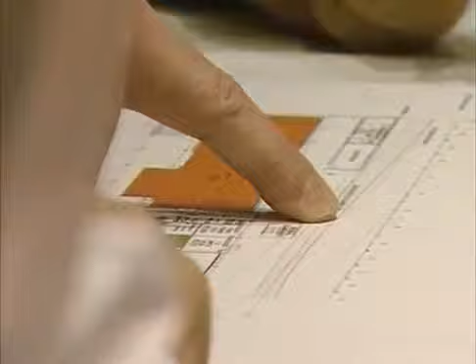Well, we had a very open brief. The club hadn't really attempted anything like this before, so they weren't dictating any particular method of working or role or brief for us. And we formed a steering group with about 7 or 8 of the key people, consultants and clients involved with the job from pretty much the outset in March, April of 2000. And we managed that group, and that really was the springboard for how the project started.

A major issue for the board of directors was to gain acceptance from the fans for a move from a much-loved home. This would be greatly helped by keeping Arsenal in North London. Not an easy task, finding enough land to host the footprint of a massive new stadium and the associated increase in traffic to and fro.

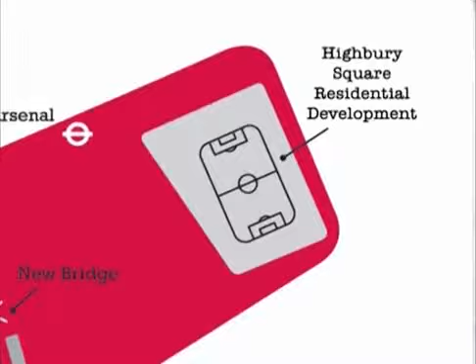Amazingly, the Arsenal directors managed to find a site only a few hundred yards from Highbury, but it was far from deserted. We very quickly realised that the project was broken into 3 fundamental parts: a new stadium, a relocation site at Lough Road where we would have to provide a lot of the facilities that were on the Ashburton Grove site, and then the final phase was Highbury Square.

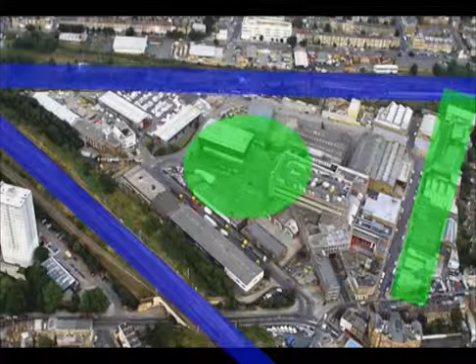Ashburton Grove is roughly a triangle. To the west and the east are mainline railway lines, and to the south a small industrial estate. In the centre lay a council-owned recycling unit, and this would need to be resited at cost to the club, as would the acquiring of the industrial units.

And the rest of the project included the very substantial relocations of the North London Waste Authority's waste transfer station, council's depot, their building maintenance department, and then there were a myriad of other occupiers on the site who all had to be relocated and their site purchased, or just a straight site purchase. And that actually became the major focus of the first 3 years of the project.

The entirety of the site included land beyond the boundaries of the railway lines and beyond the Southern Road. And whilst this extra land could all be used, the stadium footprint would have to be within those boundaries.

A key decision was taken to appoint a builder during the design process, not always the case in such projects, and a decision which in retrospect was fundamental to the outstanding success of the project.

Well, we had a very interesting shortlisting. We started with about 6 companies who we thought might be capable of building the new stadium. Really at interview, 2 or 3 of those companies didn't really fit the bill. And then McAlpine were the most memorable, really.

At interview, Rolf Christensen very much came across as somebody who wasn't in any way or shape concerned about the magnitude of the project, wasn't overwhelmed by the project, and was very confident, and even relished the deadline nature of building stadiums and having them open for the beginning of football seasons.

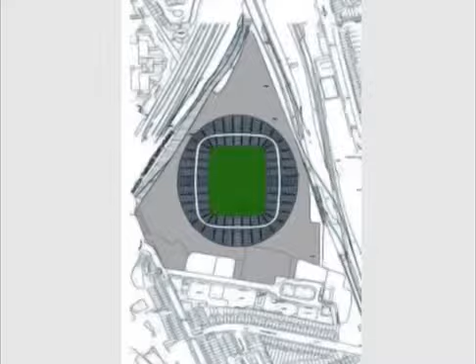An obvious but crucial design decision was choosing the distinctive shape of the stadium. A more conventional rectangular design was discounted, as it was too wasteful of much needed land, and in the end it came down to simple geometry, in that the elliptical shape fitted snugly into the triangular nature of the site, squeezing every inch from the available space.

And we were all new to it, so we all sat down and discussed every part of it, what was required, and they had traveled around at stadiums all over Europe, perhaps the world, and they had an idea what they wanted.

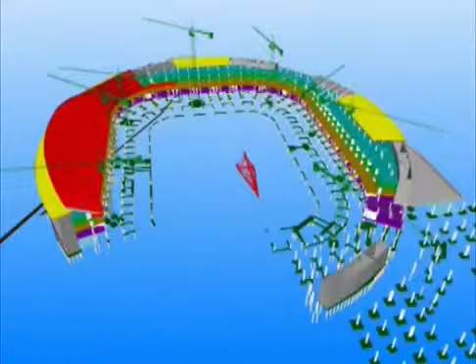We all worked very hard to get what they wanted onto paper and get the engineering right, and that was a real challenge. The 6 months we spent in pre-construction, without it I think we would have had a few problems. We avoided problems, and basically the construction went like clockwork - we completed it within time, and even handed it over earlier.

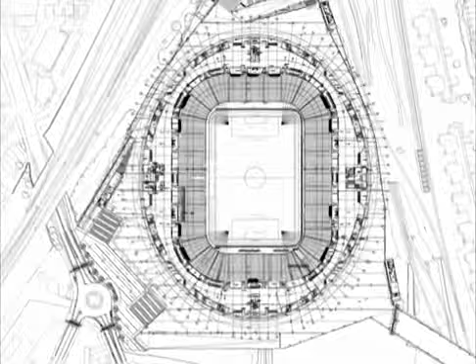To gain planning consent, the club would need to demonstrate that 60,000 fans could come and go to the ground with as little negative impact to the local community as possible, preferably using public transport.

Two massive bridges were designed on the east of the site, spanning the railway line and taking fans to both underground and above ground stations. Another obstacle was the recycling unit at the site's very centre, which would have to remain in operation through the early part of the build, whilst a new unit in Lough Road was constructed.

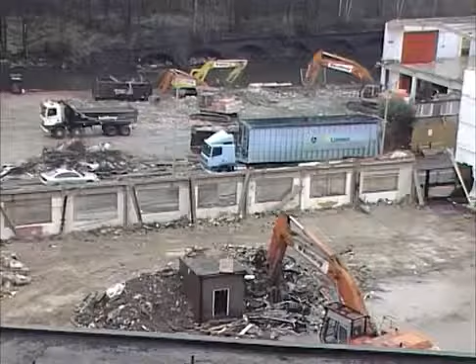Positives to the community were needed in addition to a new recycling unit, and it was determined that the stadium would generate much more than simply a new football ground. Areas within the site would contain affordable housing and give the companies on the industrial estate a chance of resettling into new premises. What was known at this stage as simply Ashburton Grove would be a much needed and major regeneration of the area.

With designs finalised and consents gained, some 2,500 signed documents later saw demolition teams move into Ashburton Grove in February 2003, and McAlpine's site teams settling into their new offices. Again, having designers, engineers and management on site was an important ingredient in the project's success.

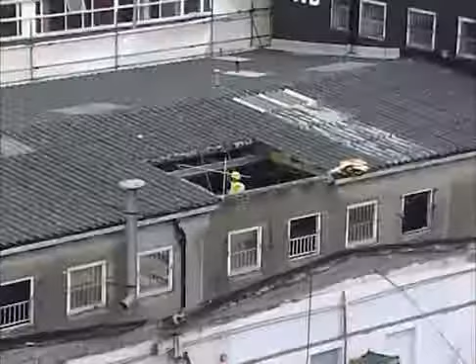Just as things were starting to happen, it all ground to a halt. It was about the end of March 2003. We'd been through, without doubt, the toughest year on the project, going through all of the contract negotiations with McAlpine and the funding with the banks. We finally had virtually every one of our ducks in a row.

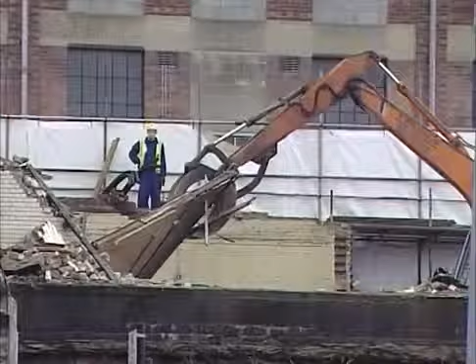Both myself and the client separately went off on holiday at the end of March. When I got back a week or so later, I went in to see him, and he gently dropped the bombshell that one of the banks had pulled out and that the funding wasn't now possible for the stadium.

Work stopped and the site was mothballed, though Sir Robert McAlpine used this pause in construction to continue design development and progress the Lough Road Waste and Recycling Centre.

Today is an historic day in the life of Arsenal Football Club. I'm delighted to be able to announce that the funding has been secured for our new stadium project.

By the time the funding came in, that was 4 years on the project, and I think everyone had put so much into it that the thought of it not proceeding was awful. So there were some pretty major celebrations at the end of February when the banks finally signed up.

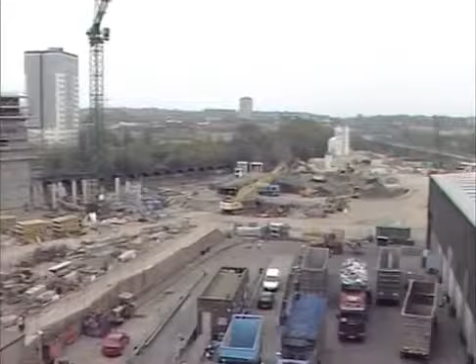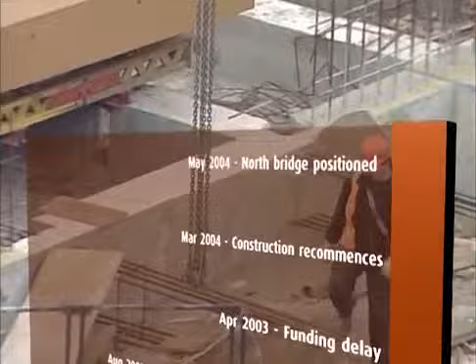With the funding now in place, McAlpines resumed work immediately and with some haste. If milestones along the critical path were not met at this early stage, it might have significant impact later in the project. Railway possessions and such like had been booked well before the hiccup in the funding. If the Arsenal board hadn't funded the continued fabrication of the bridge components, and if it wasn't for the speed in which McAlpines resumed construction, there could well have been delays.

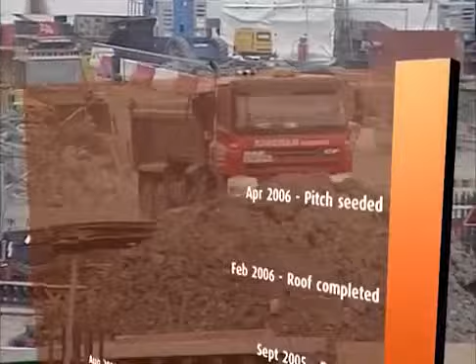Within a matter of weeks, the stadium started to take shape, and the practicalities of the construction programming became evident, with one end of the stadium apparently racing ahead. Of course, this was far from the case.

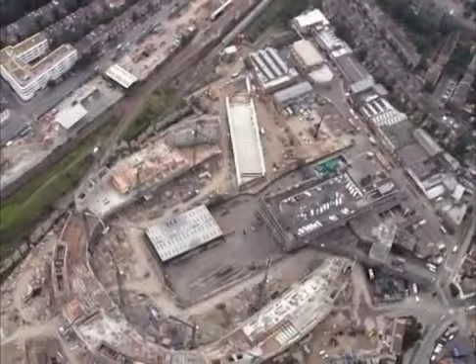Crucially, the bridges' construction had to be on time. Their assembly site actually fell into the path of the stadium, so they needed to be built and moved into place so as not to delay construction to the south end of the stadium.

Because of the constrained nature of the site, the construction programme was to commence the northern parts of the stadium first, leaving space for the bridge construction and the continued use of the recycling unit, and afterwards programming the construction of the lower terracing in the south stand to create enough space for the roof truss assembly. Any delay to either the bridges or the roof would delay the fundamental stadium structure.

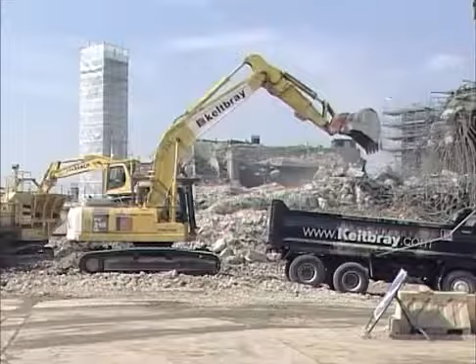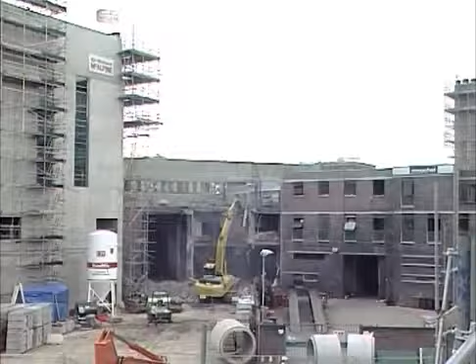We were knocking the buildings down as they were being vacated, or in the first instance having the services isolated - building vacated, demolish, remediation, and then piling, subsequently following on as closely as we could behind the piling with the substructure. So you have a fine balance all the time in terms of trying to do one operation as close as you can to the next without losing efficiency in one or other of the operations.

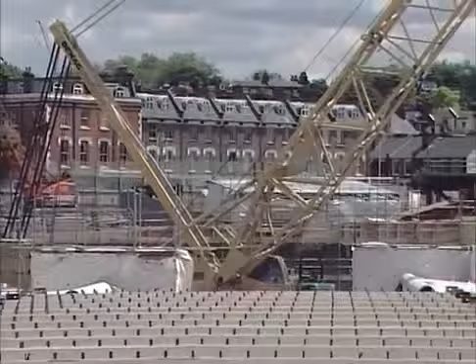Because of the unusual nature of the site, roughly a triangle surrounded by railway lines on two sides, one of the key aspects of the design were for two bridges to be constructed on the northeast and southeast of the site. To get the crowd away, we built two bridges across the railway line, and they are massive bridges. One is 26 metres wide and the other is 18 metres wide - two massive bridges just to take and spread the crowd.

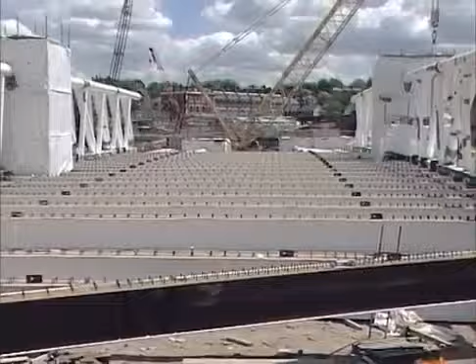There had been a few disasters with football stadiums and crowd issues, and all this was taken into consideration in the design, so people can escape all over the place.

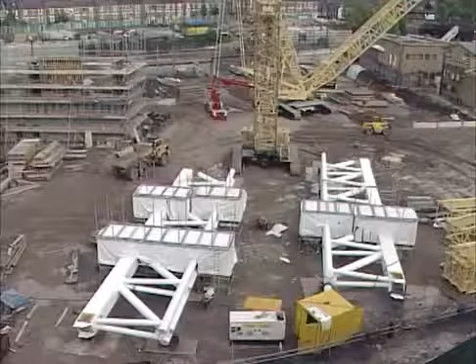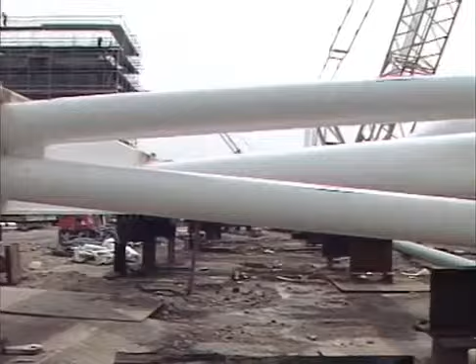Because the stadium structure would fill a huge percentage of the total site available, elements of these bridges needed to be built and completed before the stadium structure was in place. The other intricacy with the site was the extent of works we had to build that weren't necessarily related to the arena. The two bridges are good examples - they were assembled in the plan of the stadium and occupied space we needed to free up to build the stands.

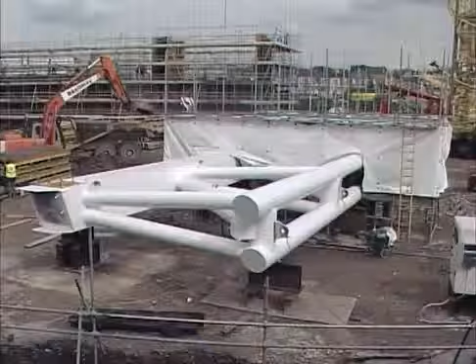The South Bridge in particular sat in the middle of the southwest of the stadium and was built as a whole 100-metre section, then slid across. Until that bridge was located over the railway line and slid into place, that section of the stadium couldn't be built. The same went for the North Bridge in the northeast corner, where elements were built on the stadium site and needed to be positioned, with dependency on getting rail track possessions to install the bridge.

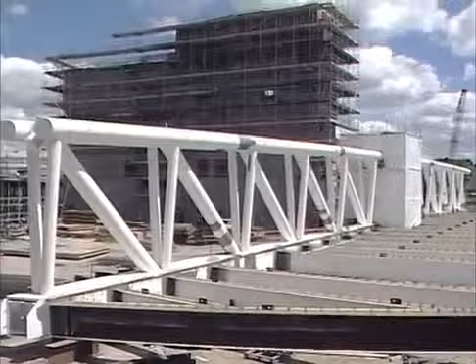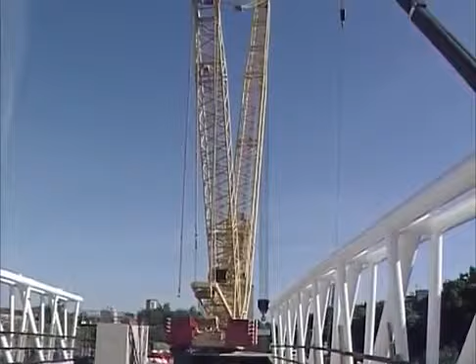There were quite high levels of risk in terms of third-party approvals, and the consequence of not getting the bridge in place was a critical path delay in the stadium. The North Bridge was the first to be completed and was built on site from pre-produced sections. The construction team always knew positioning it on time would be critical to the completion date, and when the funding hiccup in 2003 took place, the good relationship between constructor and client proved crucial.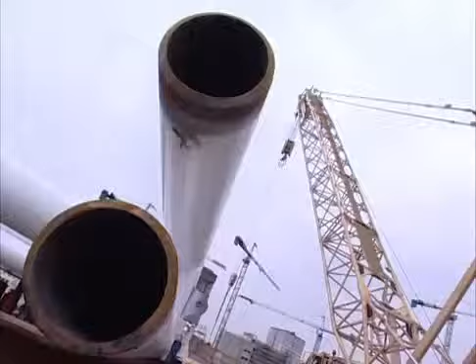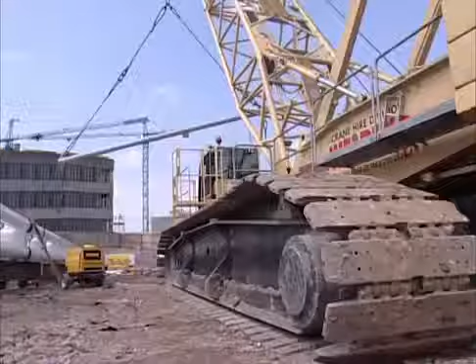We booked that possession 38 weeks prior with Railtrack, so that weekend it had to be ready. To give an example of how committed Arsenal were - that was on the critical path, and then construction was stopped in April 2003 because they didn't get the funding, and it was a long lead-in for material. Arsenal, with their own money, funded the procurement, all the material, the steel, and also the fabrication.

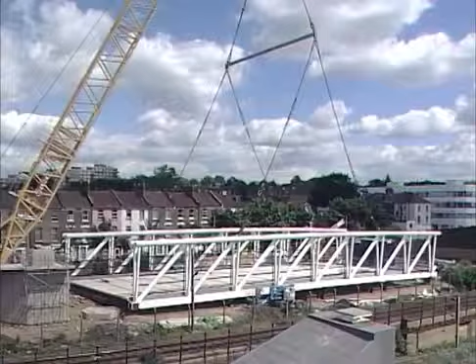So when they got the funding on the 1st of April, we were ready to go, and we managed to get it across in about 15 or 16 hours in the middle of August. That was critical because we couldn't construct the east stand otherwise. It was a real achievement - everybody pulled together and it worked out great.

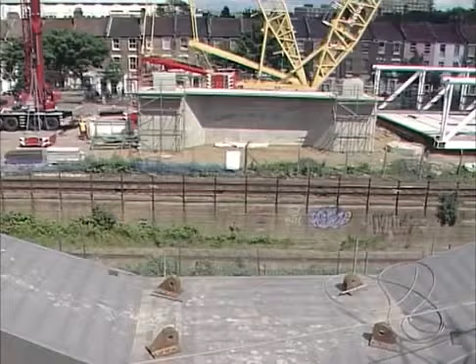With roads and railway lines closed, the North Bridge was ready to be lifted. Built in two halves of 180 tonnes each, the sections were eased into place by massive 750-tonne cranes over two weekend possessions. The second, the South Bridge, was a different animal.

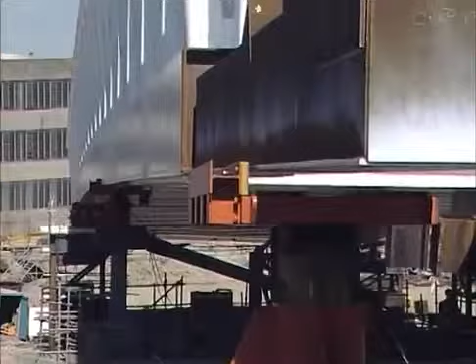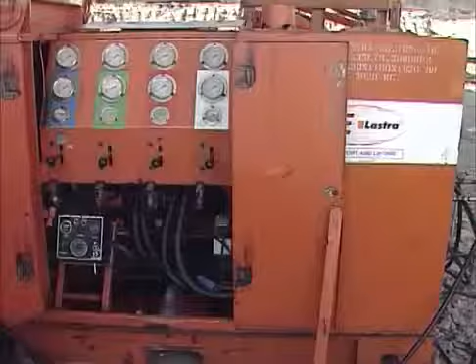It was 100 metres long and weighed 1,000 tonnes, and we basically couldn't get a big enough crane to lift it across. So we had to build it inside the stadium, inside the east stand, and then slide it across.

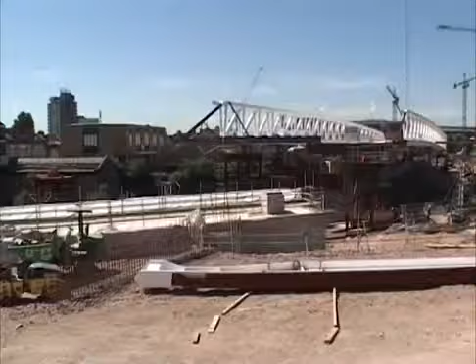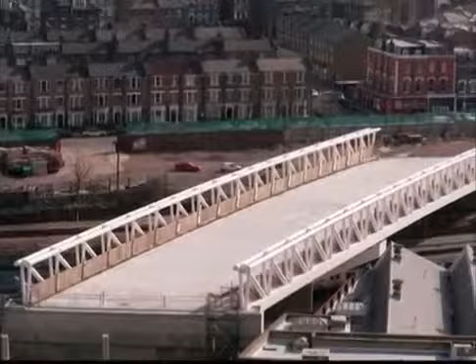A Dutch specialist contractor oversaw this amazing technical operation. A heavily greased 1,000-tonne bridge was gently but steadily dragged across Drayton Park Station with amazing precision. The bridge's completion and its moving away from the stadium structure allowed the southeastern section of the stadium to be commenced, and a major milestone on the critical path was completed on time.

With the bridges in place and away from the stadium area, attention turned to the closing of the recycling unit. Away from the glare of publicity that Ashburton Grove was creating, across town in Lough Road, the landscape had changed, and the new recycling unit was completed and opened. Built in isolation, this would have been considered a major project in any local community, and was a tangible sign to the local population of the benefits the new stadium would bring.

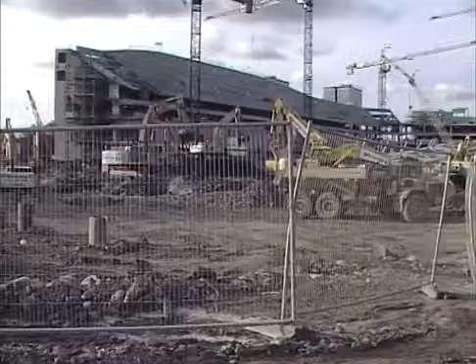Now that demolition of the waste unit could commence, work could begin on the two southernmost cores, and the area that would become a world-class football pitch could be cleared and levelled.

On the 5th of October 2004, the Arsenal directors made another important announcement. Construction of our new stadium has progressed at a fantastic rate, thanks to the great work by our stadium constructors, Sir Robert McAlpine. With the opening of our stadium in the summer of 2006 quickly approaching, we're delighted today to be announcing a significant partnership which will lead us into this new chapter in the history of Arsenal.

This relationship is for both a naming rights partner for the new stadium and also a club sponsorship agreement, representing the biggest ever financial sponsorship deal in English football. So it is my honour to announce the beginning of the partnership between Arsenal Football Club and Emirates. Ashburton Grove was now to be known as the Emirates Stadium. A major sponsorship deal had been signed, and any financial worries for the board started to seem a lifetime away.

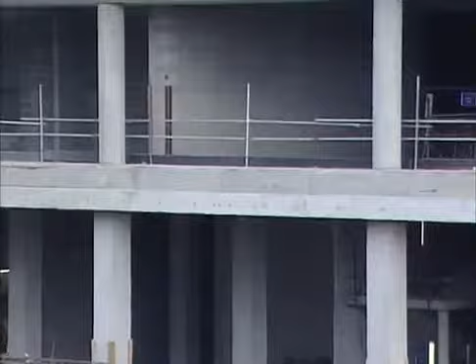The other aspect of the stadium is that on the 7 hectares footprint, the stadium covered the whole area. There was no spare land left at all. And also then you consider that we have 600 or 700 or 800 car parking spaces below. And that is helping everybody. And that is quite unusual, that within a stadium you have the parking facilities.

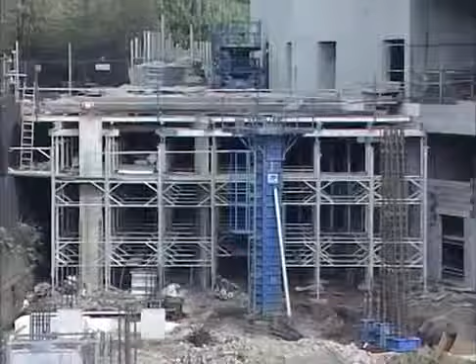The stadium has a raised podium, so everything at ground level is either car parking, changing room, kitchen, storeroom and maintenance room. But all that had to be squeezed into the footprint on this triangle we had at the stadium.

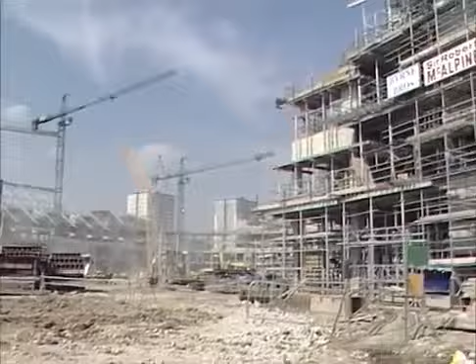The northern end of the stadium raced on ahead of the southern end, until both bridges and recycling units had moved. Then the southern cores could be built, but leaving out the southern prefabricated terracing units to allow space for the roof trusses to be swung into position. Only once the roof trusses were in position could the full stadium continue on to completion.

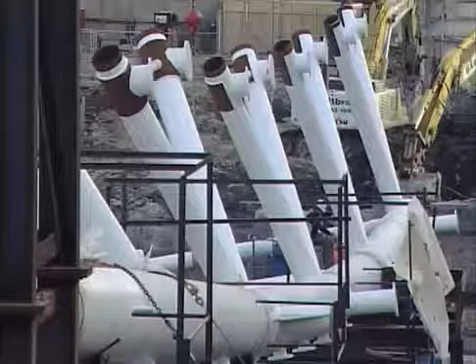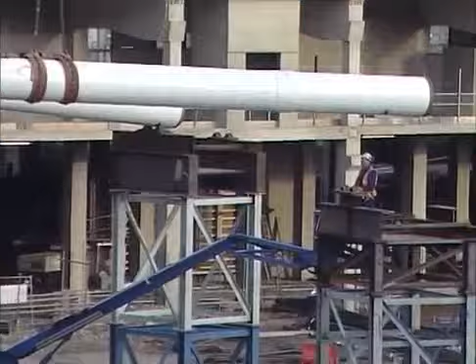The roof trusses had to be built in the same way as the bridges. Prefabricated components were shipped onto site, joined together in the future pitch area, and then hoisted into position and bolted together. The roof was a real challenge. In history, stadiums have had problems with the roof.

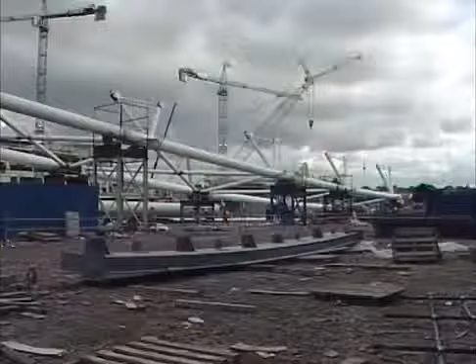And we obviously spent a lot of time together with Watson. Watson's engineering is very, very good, they are tubular specialists, and we have used them previously. We spent a lot of time with them and the structural engineer, Buro Happold. We went through how we are going to fabricate it, how we are going to erect it, and we simplified it. Originally we were going to lift this 220 meter long, 800 ton steel truss in one, but then we decided to lift it in two halves and prop it.

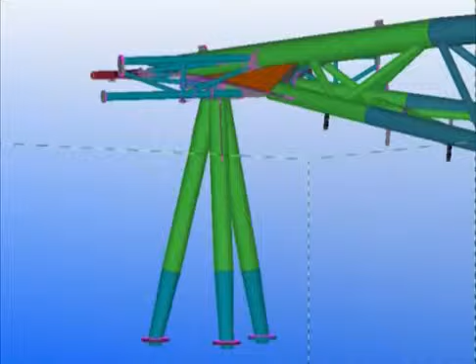And with this 3D model design they used, every steel went up fitted. It did not have to be taken down or remade. This 3D model in the design was definitely a hell of a help for us, and it worked out well. We were able to erect the roof steelwork in 6 months, and that included all secondary steel.

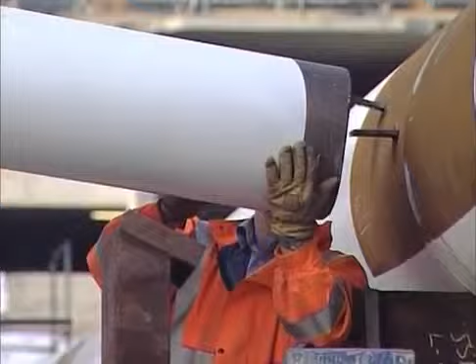We fitted the secondary steelwork at site level, so when they went up it was all fitted, and that reduced the program and also reduced the health and safety risk for people working up in the air. And it was all bolted together. There was no welding up at the top, and it went well.

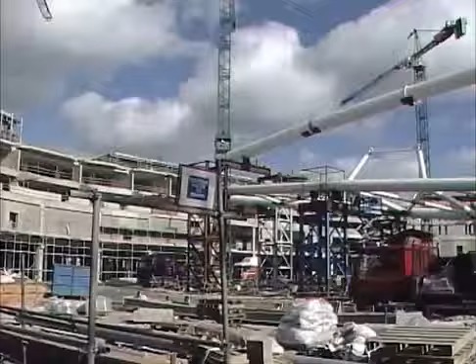The obvious example would be the roof, in terms of identifying how we were going to erect the primary and secondary trusses, the trusses being longer than the space available to sit them down in the middle of the pitch. To try and assemble a complete truss on the ground inside the stadium would mean that elements of that steel truss were sticking into the reinforced concrete structure and thereby fragmenting the ellipse.

So a very early objective we set was trying to enable us to build a continuous ellipse, albeit with the lower tier front left out. But by having a complete ellipse, it then allowed us to set commissioning zones and installation zones for the services and the fit out.

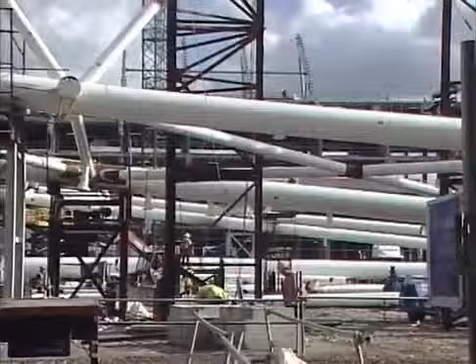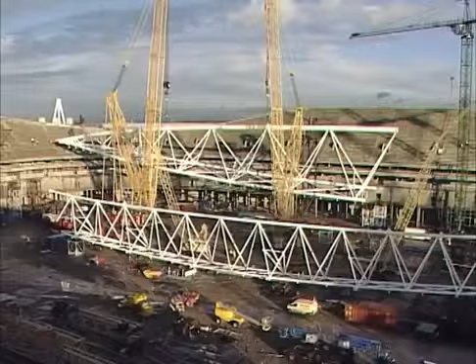Even with the programmed completion of the lower southern terracing, there simply wasn't enough space within the stadium pitch area to build the entire roof structure in one go. The northern end was built first and lifted in December 2004, then the southern end built and lifted in the following April. The cranes were back. The sections were lifted onto 4 gigantic tripods in each corner of the stadium and supported at the midpoint on temporary trestles.

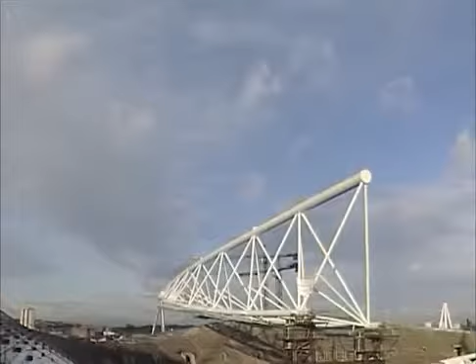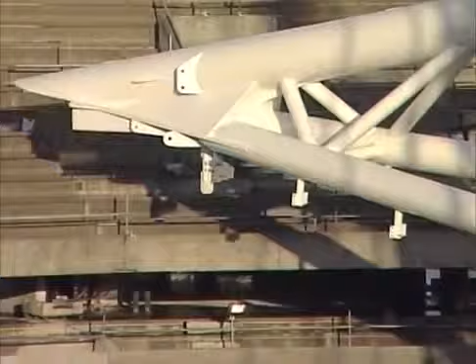The installation of the roof trusses freed up commencement of the lower terraces, and in particular in the west stand, where all the players' change areas and referee change and so on, there were quite a lot of rooms beneath those lower terraces, with all the associated services and plumbing and showering and so on. It was critical to get out of the way to complete the frame.

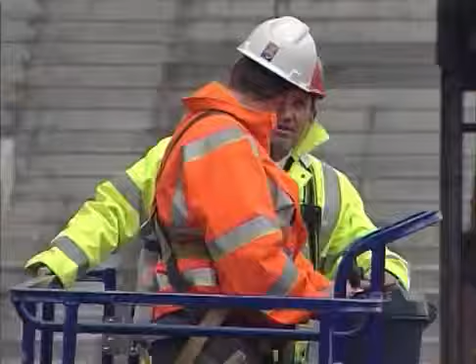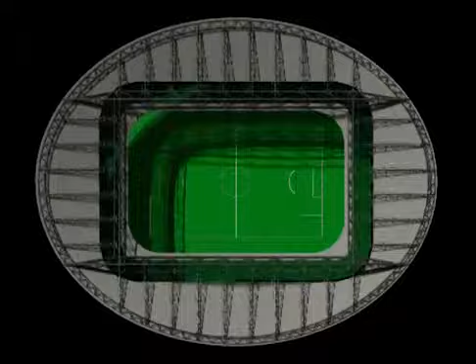Finally, when all in place, Arsenal director Danny Fiszman was lifted into position to place the ceremonial bolt joining the 2 roof halves together. With the roof trusses now in place, the future pitch was now clear and the race for completion was on. The inward sloping nature of the roof presented a number of challenges in terms of removing water from the internal perimeter and allowing sufficient sunlight onto the pitch, to prevent the problems that other stadiums had of reduced sunlight affecting their playing surfaces.

The roof is all in one piece and moves around therefore with temperature and wind, and moves quite a lot. And therefore the glazing that fits between the roof and the top of the concrete stands, and is glass in steel frames, has of course to articulate quite significantly in order to accommodate that movement. So it not only leans, but it leans inwards and outwards and sideward both ways.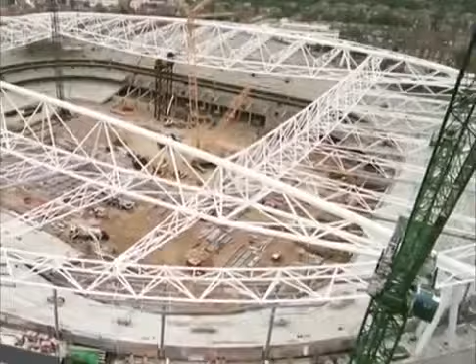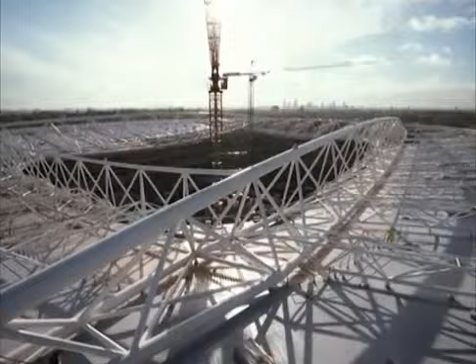So getting that to go up looking as if it was right and have enough movement capability in it to accommodate the movement that's going to hit when winter comes or summer comes, and we had some hot temperatures in the summer and some cold temperatures in the winter, was interesting.

The stadium structure was now complete, and another key milestone, the attainment of full height, was celebrated with a traditional topping out ceremony on the 15th of August 2005. A team of Arsenal directors played a team of Sir Robert McAlpine management and other project partners in the first game of football to be played at the Emirates Stadium. The major structure was now complete, and the job of fitting out this enormous stadium was to begin.

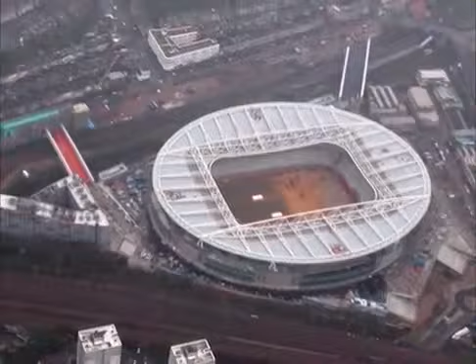We've got 10 chillers with a capacity of about 5 megawatts of cooling capacity. We've got over 50 air handling units. We've got about 40 catering establishments, whether it be kitchens, one large kitchen, a central processing unit, with about 16 kitchens and 20-odd catering establishments. So it's quite a large distribution system.

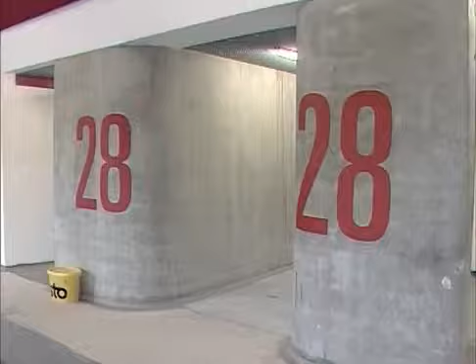When the stadium was designed, and with the initial funding concerns, the interior of the stadium was designed as a basic fit. Piping in toilets would be exposed and blockwork would be more visible. As more investors came on board, and with the Emirates sponsorship sealed, an upgrade in the fittings and fixtures was now possible. Then came a new challenge with the catering.

And then the catering man pulled out. It was a problem. They didn't have anyone to fit out the kitchen and the concession. And they came in and said, what can you do? And we did, we fitted out the kitchen and the concession.

Over the course of the stadium build, over 300 changes were made to the original design. It's a testament to the relationship between client and constructor that most were agreed on a handshake and all were achieved within the agreed contract price. In the contract, they said that we want the same quality pitch that they have at Highbury.

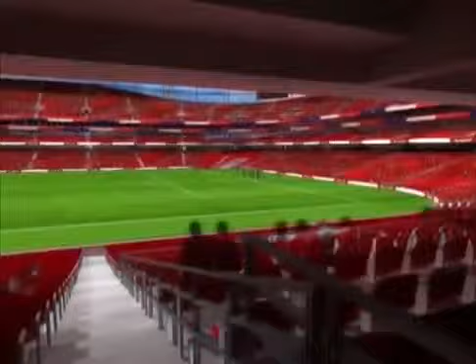Okay, Highbury is known to have had the best pitch in the Premier Division. The original design of the pitch had a set of sight lines which, under UEFA conditions, who have a bigger advertising board, you lost sight lines on certain groups of seats, and it had been laid out by the designers that this occurred. But as the job progressed, we worked on trying to change the pitch levels to optimise sight lines relative to advertising boards.

the Arsenal board. The top two sides in the Premiership going directly to the group stage of the Champions League, Arsenal were lagging behind the top two. This would require them to play a qualifying match in early August, and the contracted date for completion was August the 1st. With ramp-up events needed prior to granting a safety certificate, the club had to ask McAlpines to try and finish early. I mean, it was vital that it was finished.

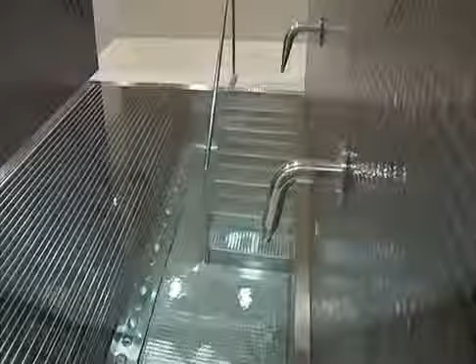I mean, what we allowed by working together in the last 2 months, they installed the IT and the telephone lines. All the furniture was being installed, the kitchen was being commissioned. We did our commissioning and snagging and de-snagging, and we expected to have 400 or 500 people on site for the last month. It was 1,500 people on site. And on top of that, training was going on with all the stewards. I mean, Arsenal has about 1,000 stewards, and that was going on at the same time.

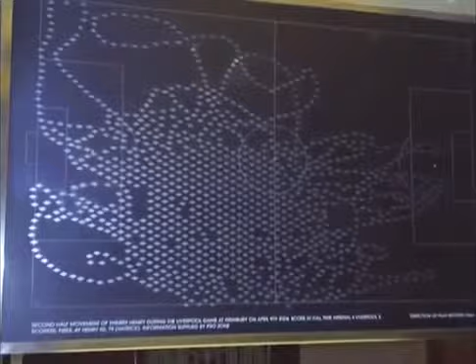And then the catering people also trained 300 or 400 people, and that was all in the last few weeks. So the last 6 to 8 weeks was a little bit hectic, but everybody kept calm and worked together. And I think if we hadn't had a good team spirit and good trust between ourselves, it could have been 2 or 3 months delay. And basically we allowed them prior to practical completion to go in to do the training, to do their commissioning. And the reason for that, we were all in the same boat and had one objective, that was to complete it on time or earlier.

In the climate of delays to the new Wembley project, the Emirates team set a completion date in July and a first match of the 22nd of July. It was to be Dennis Bergkamp's testimonial, Arsenal versus Ajax. 7 days or 10 days after we got PC, they had 50,000 people in the stadium and played the testimonial for Bergkamp. And everything worked satisfactorily, getting spectators in and out, the IT, etc. And it was what the Arsenal directors said afterwards: it's unbelievable, we have had 54,000 in and no snags at all.

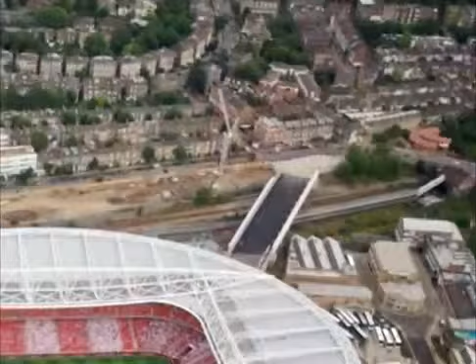I think it was a model project. It was a fast project which we completed on time. We obviously completed it within budget, both of which are huge ticks in the box for any potential client, and they're not easy things to deliver. My primary memory is coming over the South Bridge with my wife and 2 sons to the Bergkamp testimonial. That's the thing that will stick with me as a lasting memory. It was probably the first time it really dawned on me, with everybody coming into the stadium, just what it was. So that'd be my abiding memory.

The people whose project it is are HOK, who designed it, and Arsenal, who had the vision for it. What I did was help to make it work. In my eyes, it's a model, and I think for McAlpine it's a model project, that we managed to build something the team, including HOK Sport, has not done before, and we did it. And again, there's a lesson there. If you apply simple engineering knowledge, you can do a lot.